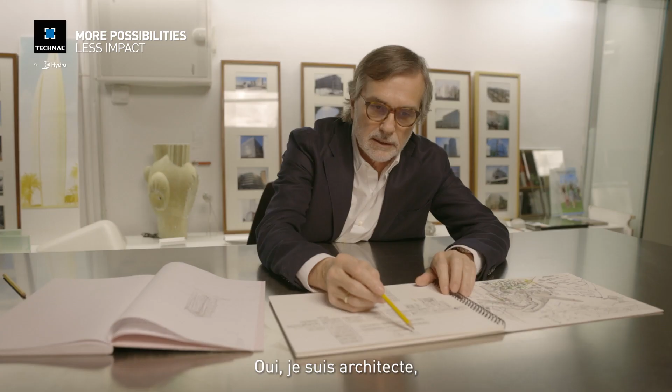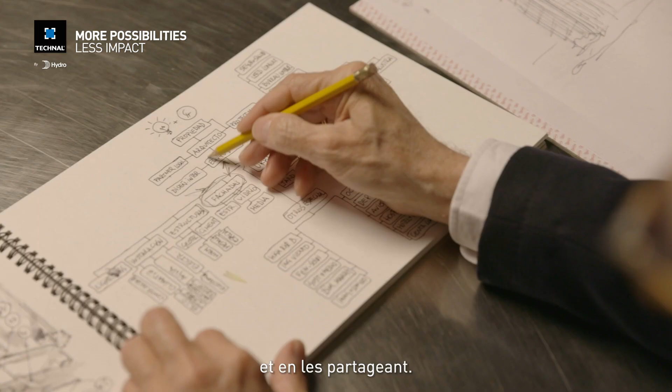First of all, I would like to introduce myself with a simple sentence. Yes, I'm an architect, but an architect with a special profile, because my team and me, we have developed more than 180 buildings over the last 30 years, making credible the ideas of others, sharing them by teaching in different universities, and especially drawing.

We have a small and very dynamic office based in Barcelona, from where we offer facade consultancy for the best architects around the world, including Pritzker Prize winners.

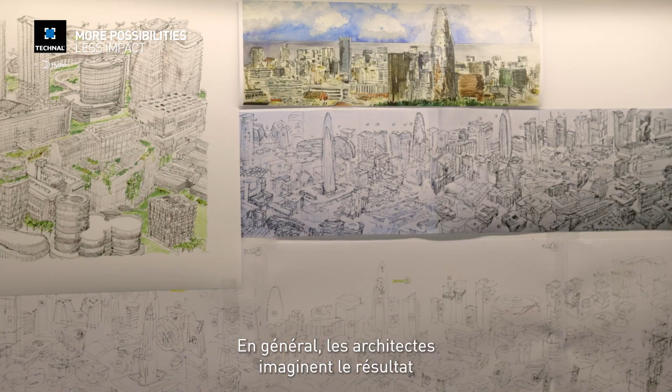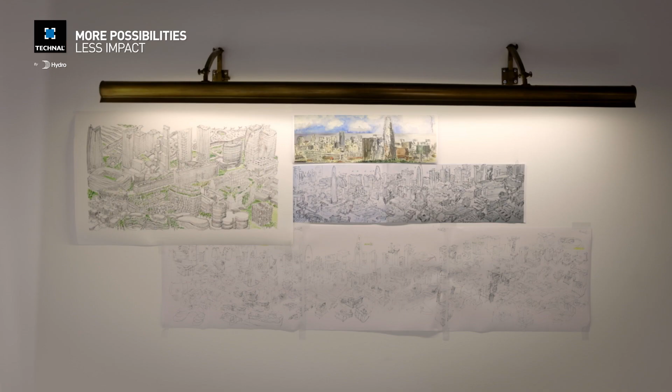Usually, architects imagine the result and the engineers create the process, or explaining it another way, architects think what, and engineers know how. So we, as facade consultants, move in an equidistant position between both, and our projects are developed with a simple philosophy: technique and form are the same.

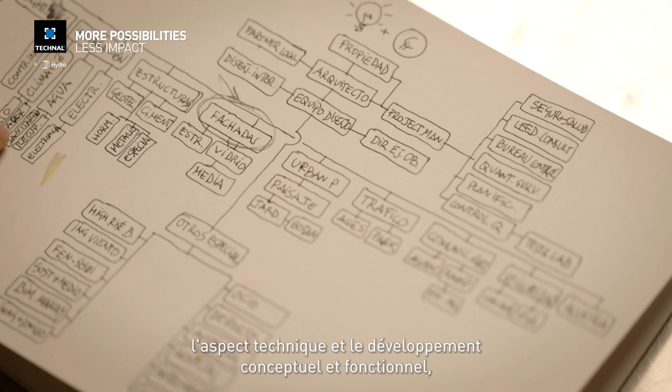Every day, more and more architecture studios focus their work on the level of definition of the facade, the technical aspect, and the conceptual and functional development, leaving the detailing and specific elements of the facade to be delegated to the technical specialists from the industry.

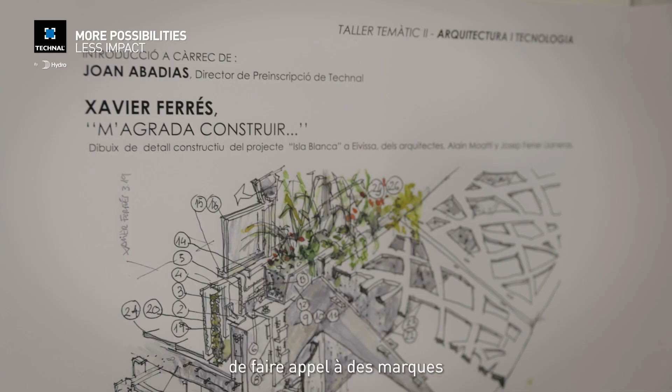So the most common way to face the problem of the technology is to claim the support of brands that help us develop the most ambitious projects. Our role as consultant, in addition to the above, is to think and advise from the strategic development.

The present leads us to consider energy as one of the engines of evolution, and this has been the case for decades. However, this contrasts with the need to work with large formats and glazed surfaces that put the so-called window-wall ratio in contradiction with the energy performance of the facade. On the other hand, this need to increase sizes requires larger panel dimensions, engineered for bigger and heavier glass panels, by means of an innovative connection and reinforced glazing support.

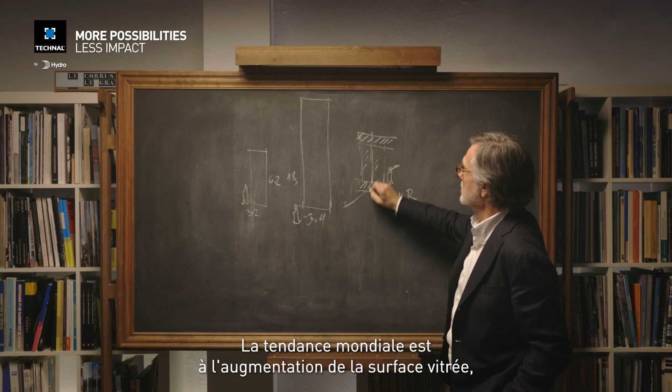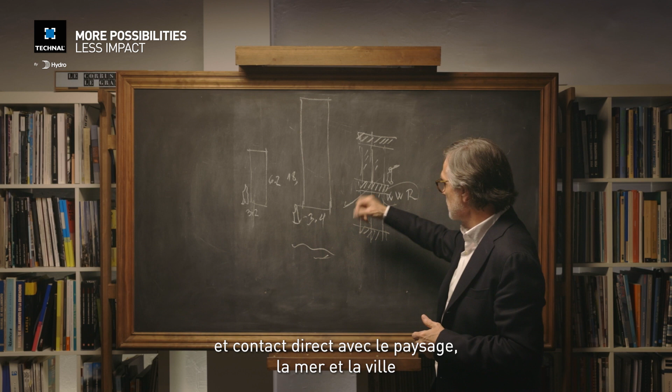Last year, we started with jumbo glass of 3.2 by 6.2 meters. Now, with different suppliers, we have glasses up to 18 meters in height by 3.4 meters wide. So obviously we can use these sizes of glass. The trend of buildings around the world is to increase the glass surface, but balancing with the window-wall ratio, because we need to balance the comfort of users contacting directly, across the glass, with the landscape, the sea, the rest of the city, in order to respect the rules and regulations in terms of energy savings.

The only way that I can explain my experience, my thought, my feeling about the technical decisions, the technical elements, is drawing. My brain is connected with my hand directly.

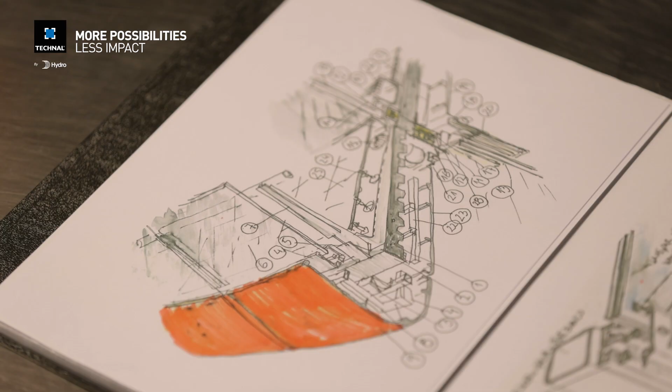When we are creating, we have to pass from the concept and schematic design development to construction documents, trying to be proactive with the architects, normally our clients, in order to achieve the maximal fidelity to the original idea.

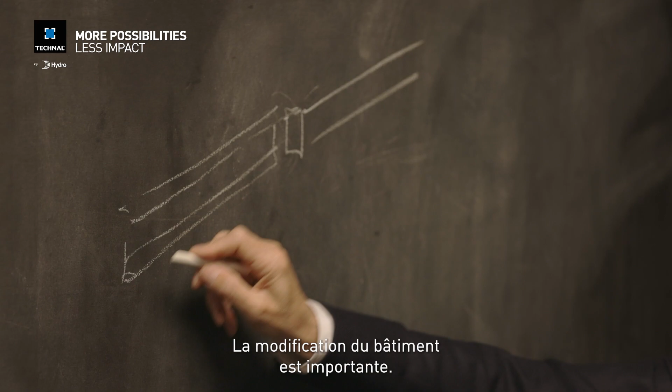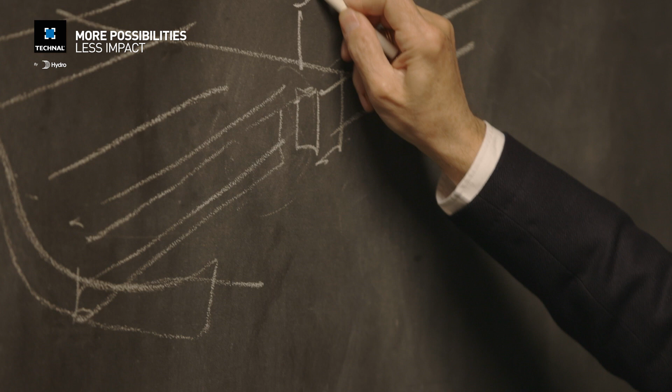For example, a building under construction in Barcelona, named Diagonal Zero Zero, a multi-story building, I think 27 levels, with a special balcony. This is the original slab, because it's a huge modification of the building. This is the slab, this is the beam that we have to support, the level of the interior floor, this is the exterior floor, and we have a shape like this.

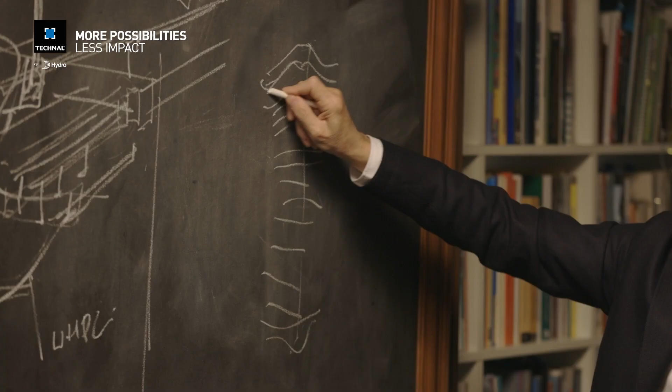This is a balcony, this is a terrace. The building is something like this. It's more or less 110 meters, and all these balconies are here. And here, in the lateral facade, we have a typical curtain wall.

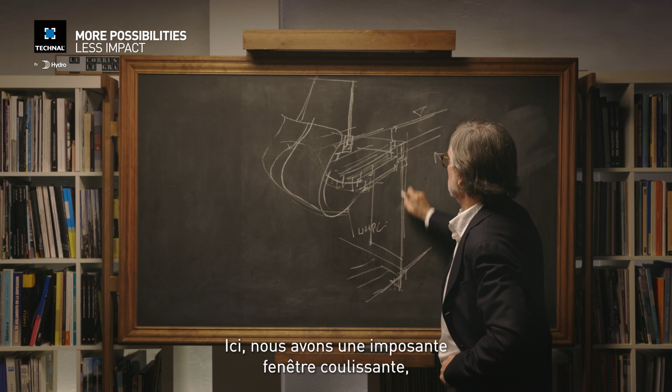It's a profile typical with spandrel and glass and windows, etc. The pass from here to here is very important to understand what happened. What is the slab? What is the structure? What is the weather line? In this case, with a sliding corridor, a sliding window, a huge, maybe 2.50 meter height. We'd like to show this in color, but I think it's clear in order to understand what happened when we have to develop from the concept to the detail.

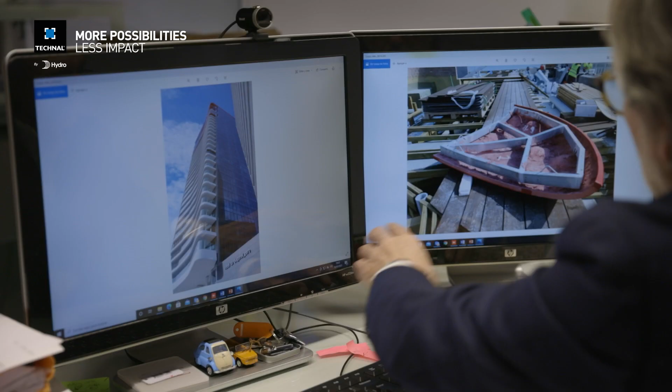The second case we'd like to share with you is a commercial and residential building in Ibiza, named Isla Blanca. The author is l'agence Moatti-Rivière de Paris. The project is led by Moatti, and the local partner is Xavier Ferrés.

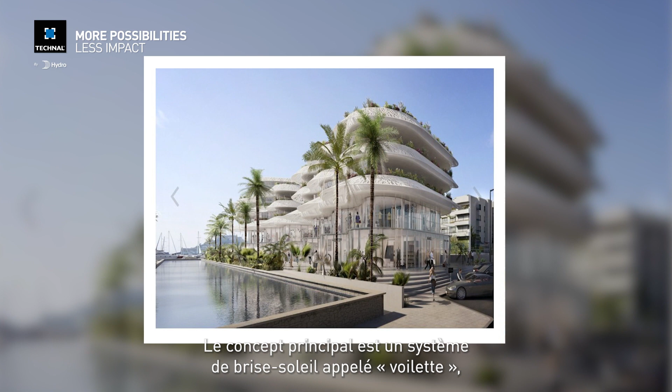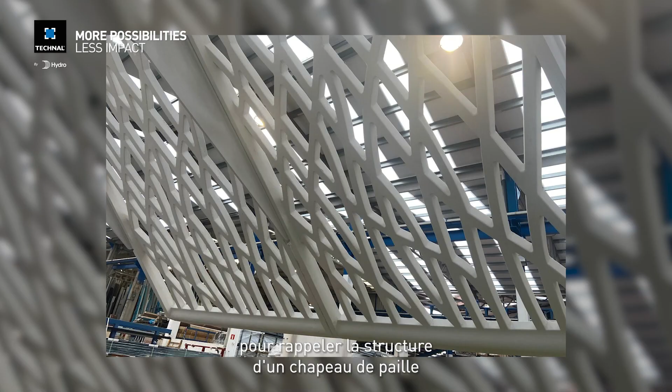The main concept is a shadow device named voilette in français. It's an element qui vole. So the building is double like this, maybe 80 meters of length from here to here, using this kind of material like a hat that produces the shadow under the face of a woman on the beach. And this element is something like this.

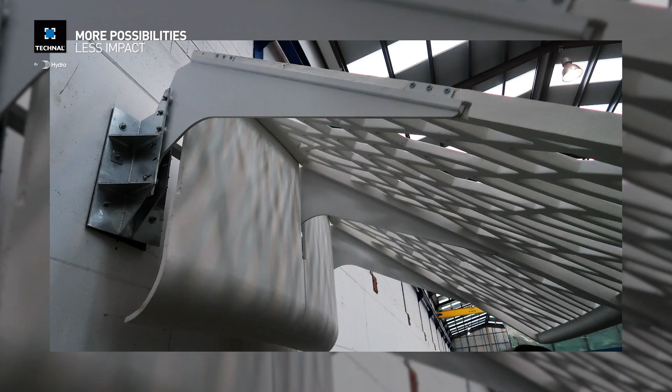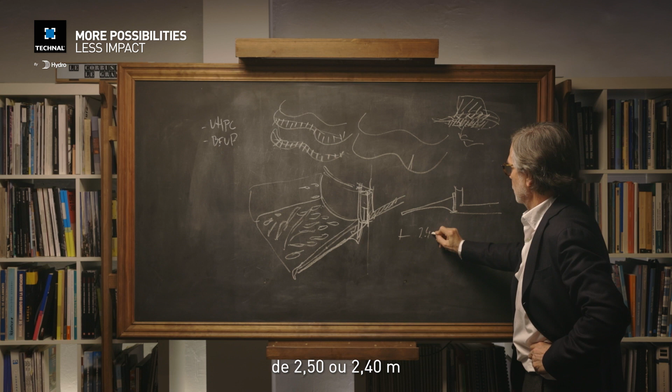There are different molds, because this is the main structure of the building, and here is hanged a huge element like this that supports these curves. So we have the structural element. This is a cantilever, more than 2.4, and this is the voilette in ultra high performance concrete that allows it to work perfectly like a shadow device.

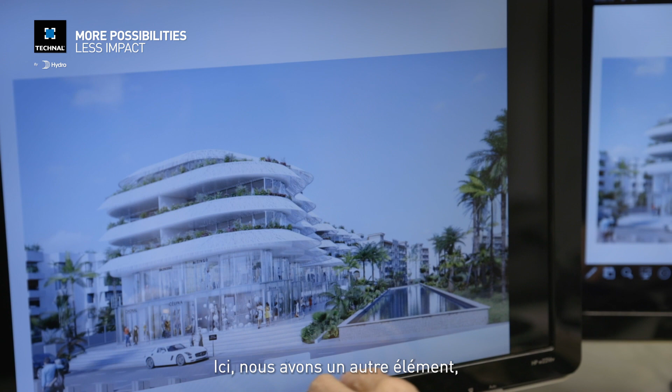So we have the vegetal elements here, and we have the windows, openables, etc. So from here, we have as well another element here that is the characteristic of this building.

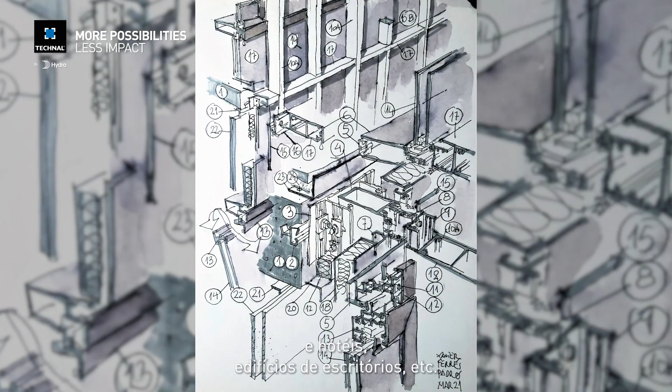The third case study is a multi-story hotel in L'Hospitalet, near Barcelona, in the Plaza Europa zone. It's a huge complex with a lot of buildings, hotels, office buildings, etc. This case is a project of Alonso y Balaguer. It's the most common and typical curtain wall facade. The building is a parallelogram like this, with a typical zone with machines and the HVAC equipment, etc.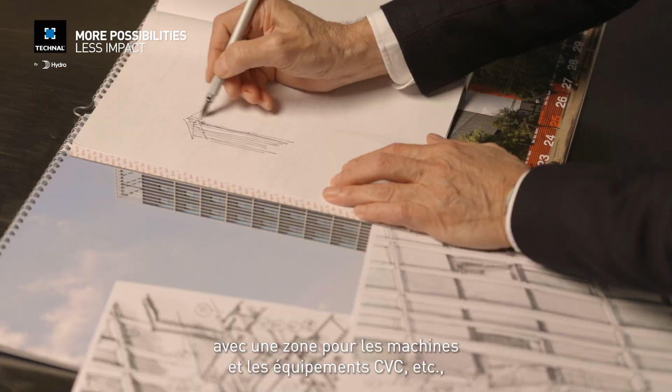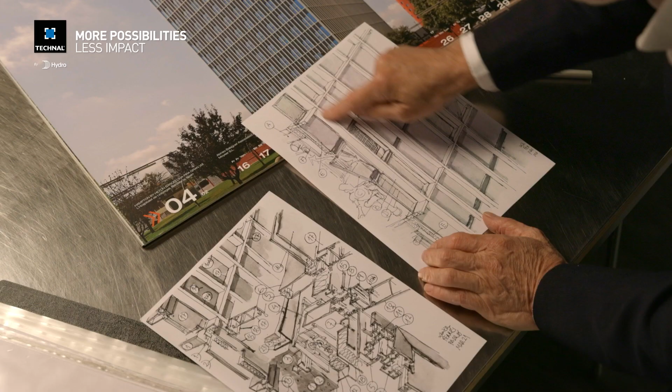The rest of the facade is a grid, absolutely regular, with the profiles that I will explain, because in terms of technology it's very simple, but the effect is really very interesting. So we have these two profiles, clipped, and the main mullion of the facade, and that's it.

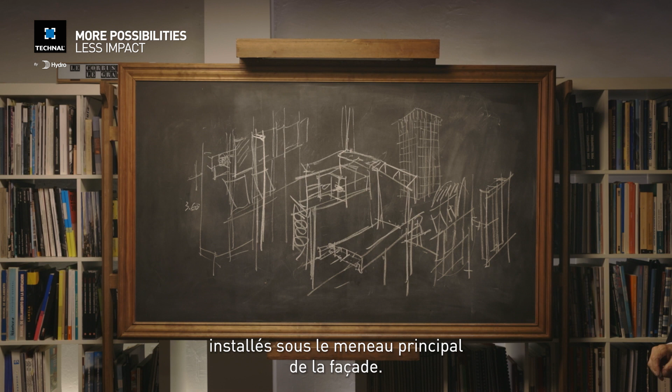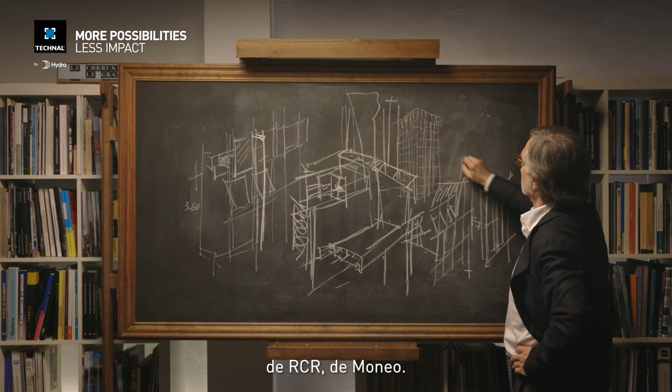So we have here the Toyo Ito building, the Nouvel building, RCR here as well, Moneo. It is a very interesting complex that I invite you to visit, because if you are a passionate architect, I think that could be a good option to spend one day in order to know directly all this kind of different architecture.

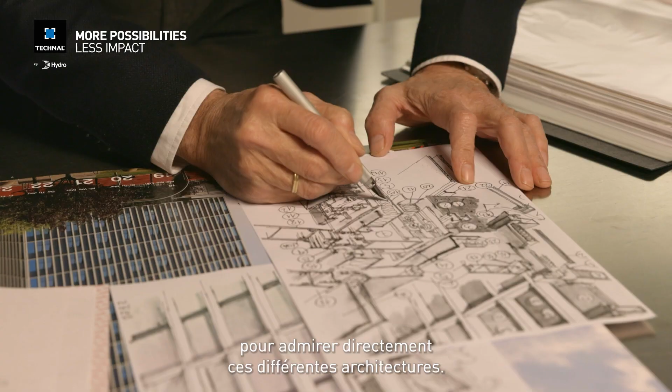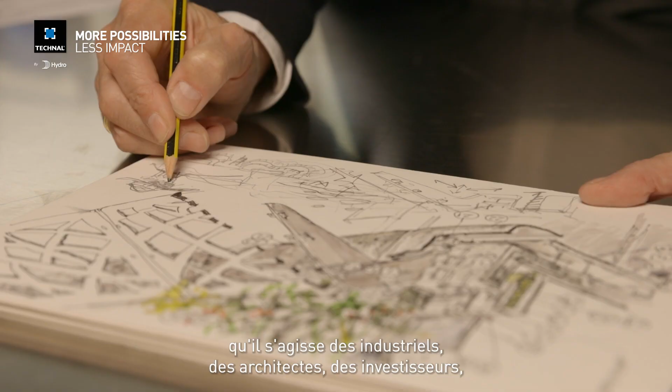As a conclusion, I would like to share with you 5 thoughts as a summary. First of all, evolution that improves considering aspects from different points of view, like industry, architects, investors, owners, and consultants like us.

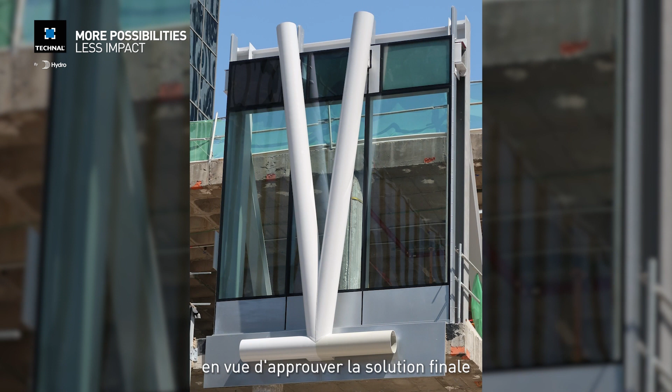Second, the extreme conditions of use are solved by anticipating the problems and building samples and performance and visual mock-ups that are tested by the owners in order to approve the final solution, to check the transparency, the vibration, all the aspects that we have to control by using prototypes and mock-ups in real size.

Third, we have to look for collaboration with international brands that belong to a big and well-known group. This is the best option to guarantee a long experience of success.

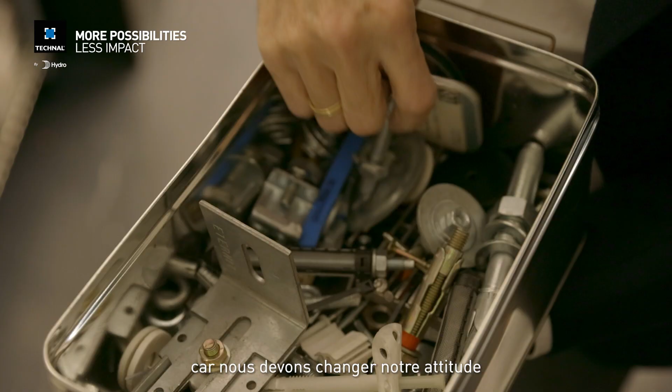The fourth topic, important to sum up this small explanation, is to involve the clients and users in the project: planning, commissioning, exploitation, maintenance, living and recycling the building as a way of working, because we have to change our attitude about the design and use of buildings.

And finally, we have to work from a global perspective, making it essential to combine the most diverse languages, cultures, rules and regulations, economic and social criteria with the most attractive architectural proposals. And for us, it's a privilege to be able to create a space for a better future.

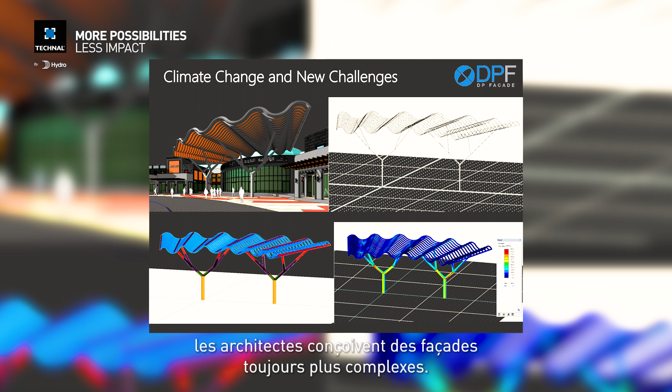On top of that, to make matters more interesting, architects are designing facades that are increasingly complex. It's almost like a competition, who's going to get the ideas that outdo the predecessor, so to speak. And we get complex geometries, various aspects in the design of facades that really challenge us to bring our best when we work on this project.

To do this, we've had to develop or acquire a bunch of new tools that we did not traditionally use. When I started as a young facade engineer, I used to do everything by hand, whether it's the sketches, the calculations, everything was done by hand. Today we are using technologies such as BIM, parametric design, and dedicated engineering software. We make use of 3D rapid prototyping to test ideas, to see, does it even make sense? Is it buildable?

We've even developed tools that are not on the market, something we call IVMU, which is an interactive virtual mock-up, which allows the designers - the engineers, the architects, the owners, the building developers - to use virtual reality goggles to visualize in real time what their buildings and facades are going to look like, and to make changes in real time. This is really a fantastic tool we've developed over the past couple of years, and it really changes our approach to designing facades on these complicated buildings with multiple materials and complex geometries.

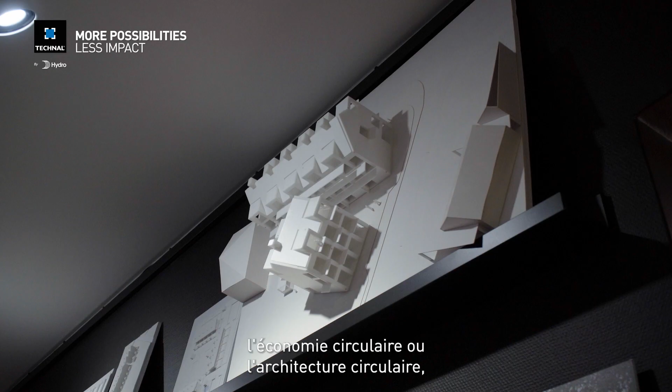The next one is circular economy or circular architecture. And then we work focused with biodiversity. On the social sustainability side, we work with safe environments, health and well-being, and then placemaking.

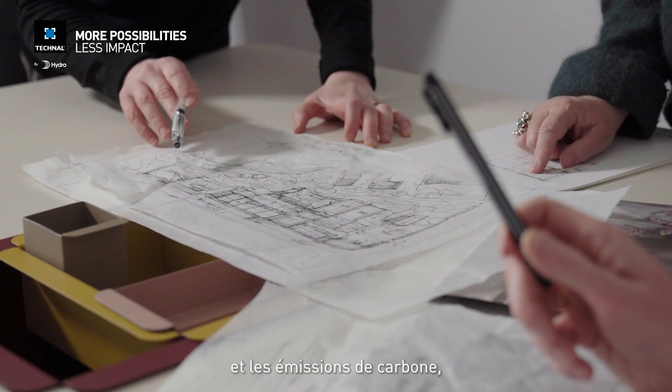So if we start with climate smart architecture or carbon emission as focus, we work very much on designing buildings with a low carbon emission or a carbon footprint. And that is both from operations when it comes to energy efficiency, but also when it comes to embodied carbon, which means the carbon that is emitted when producing the materials that goes into a building.

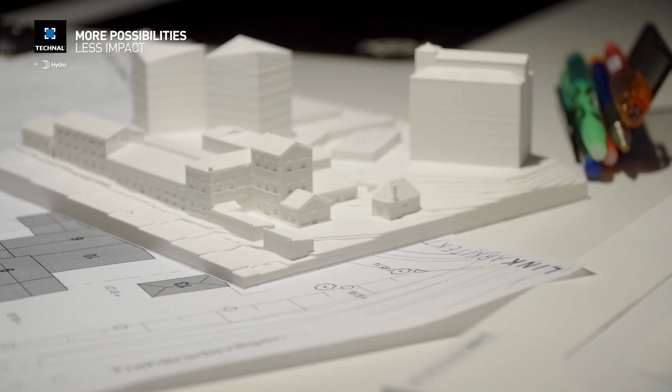If we then talk about circular economy and circular architecture, it's very much about designing resource efficient, securing that we don't use resources unnecessarily, but also about taking care of the buildings that are already built, so transforming or renovating buildings before we start looking for producing new buildings.

It's also about reuse and recycle of materials, and also designing for circularity, preparing our buildings for a future that is more circular than it is today.

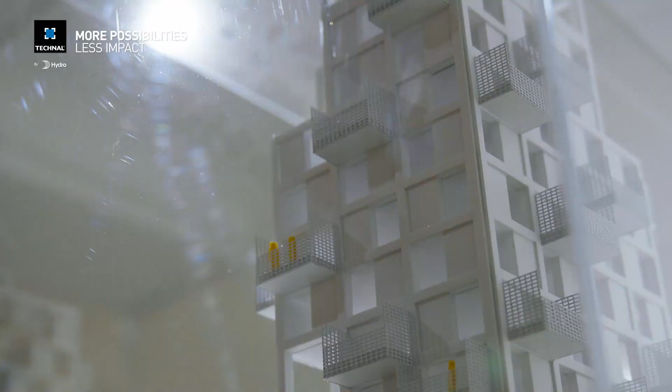And then we can talk a little bit about biodiversity. We know that the built environment and producing materials and constructing the buildings have a great negative impact on biodiversity. So when working with the built environment, it's really important to look at biodiversity and see how we, when we construct our buildings, can choose materials that have a low impact on biodiversity, and also work with biodiversity when we create the environments, the built environments within the cities.

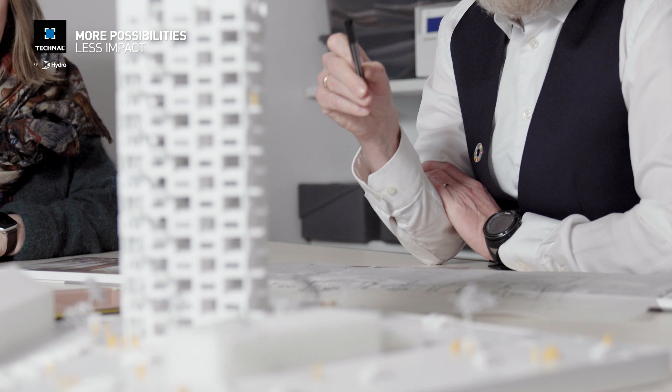If we then talk a little bit about the social sustainability that we work with, one of the areas are safe environments. We know that creating safety within, for example, residential areas, schools, housing, etc., creates people that feel safe and can take in, for example, in schools, can take in their education better. They come to school. Not being safe at school can make students not come to school. So safety is a very important part of our contribution to social sustainability.

And then we can talk a little about the health and well-being. That is an important part if you work with offices, hospitals, schools, also residential areas. If you can support a living that is healthy and supports well-being, then you can solve or contribute positively to some societal challenges. We know stress is an area in at least the Western world that is problematic, and we know about the different heart diseases and so on.

And then the last one is about placemaking, and that is both about safe environment but also about interesting environments, places where you want to stay, places where diverse people can come and meet, and you can feel the inclusiveness because you want to stay there, you want to meet other people.

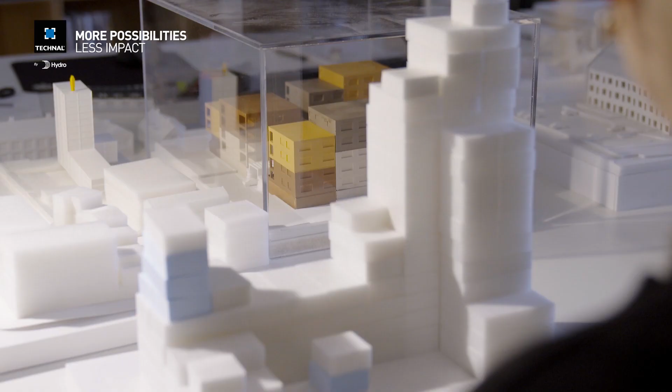And then we also play a very important role when it comes to the actual design. So through the design we can work with, for example, indoor environment when it comes to designing so that daylight comes into the building, that you have a good view of the scenery, and also working with designing so that we minimize the negative impact of the built environment in relation to resource usage or carbon emission and stuff like that.

And then when we come to looking at choices that we make, for example, in relation to materials, we have a great possibility to influence the final positive impact in relation to sustainability by choosing materials that we know can lower, for example, the carbon emission, the carbon footprint of the building, or adding to some qualities in relation to indoor environment.

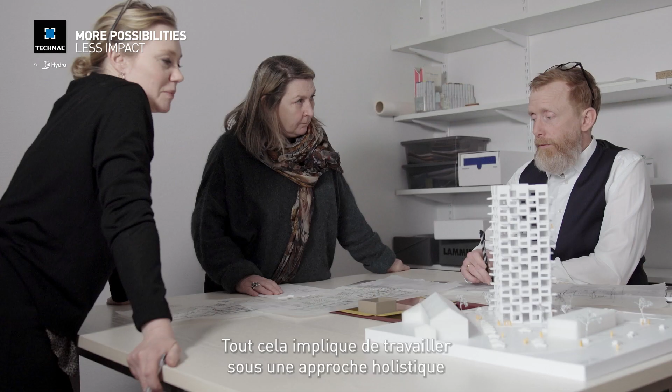We know that the construction industry is emitting some 40% of all carbon emissions, and we also know that the built environment has a big impact on water and biodiversity. All this together makes it really important to work holistically in relation to sustainable development. Talking about carbon emission, it's really important that we not only look at operation, because if we look at carbon emissions, we have 1/3 that comes from embodied carbon and 2/3 that comes from operation. But we also know that carbon emission from embodied carbon is emitted day one, and we're quite in a hurry to turn the trend in relation to carbon emissions.

So we have to have some 40% lower carbon emission in relation to embodied carbon by 2030 to be able to reach the 1.5 degree target defined by the Paris Agreement. So a building that is not addressing embodied carbon, I would say, is not a sustainable building at the moment. Then it comes very natural that the one that has the lowest carbon emission is the best one to choose from a sustainability perspective, so you can compare one with another and go for the one with the lowest carbon footprint.

You should always start with taking care of the negative footprint of your own production, because that one you can be 100% sure makes a difference. When choosing to compensate, you will never know if that forest you have planted as compensation will be there in 20 or 30 or 40 years.

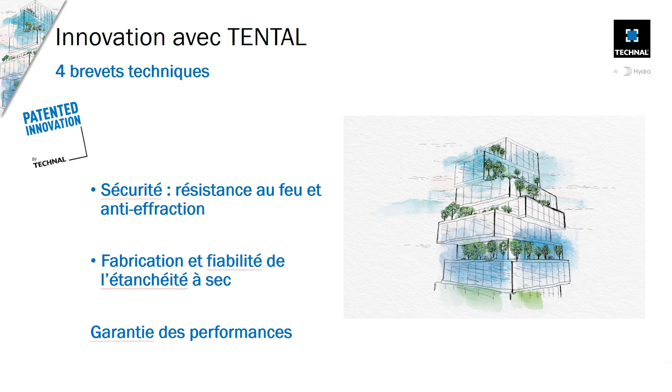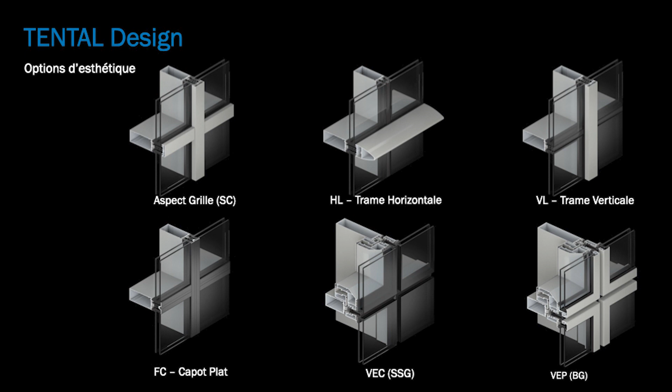Mais une façade, c'est aussi une création, une signature architecturale. Le design était bien sûr au cœur de notre réflexion. Nous vous proposerons des applications variées, allant de l'aspect grille à la façade lisse, en passant par la possibilité de faire des trames horizontales, des trames verticales, du capot plat, ou encore du VEP. Une grande diversité de capots avec des styles et des profondeurs variées qui pourront également être enrichis de créations sur demande. On compte sur vous pour revenir vers nous sur ces sujets.

Jouer avec les formes, que ce soit des vitrages inclinés, des façades à facettes, mais également avec les finitions, tout cela sera également permis. Tental sera disponible dans tous les coloris laqués, anodisés, et vous pourrez profiter des couleurs exclusives Technal pour donner libre cours à votre imagination.

Nos solutions ont pour objectif de satisfaire et d'assurer le confort des utilisateurs finaux. Avec Tental, le confort va passer par la maximisation des surfaces vitrées pour plus de luminosité, avec des surfaces pouvant aller jusqu'à 12 mètres carrés et des reprises de poids jusqu'à 700 kg.

Également la possibilité de gérer les apports solaires, grâce par exemple à l'intégration de systèmes de protection, sans altérer les performances de cette nouvelle façade. Tental présente d'excellentes performances thermiques ainsi que des performances acoustiques pour assurer un confort maximal aux usagers.

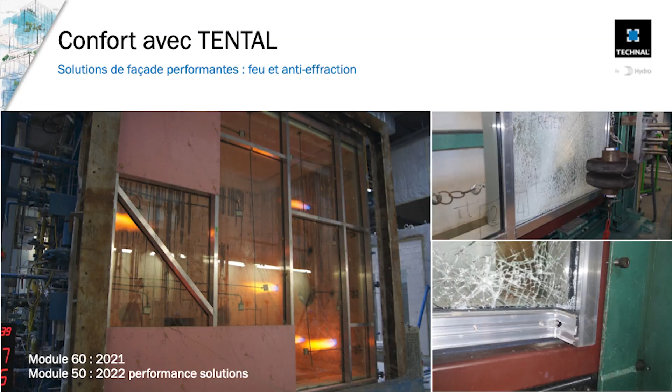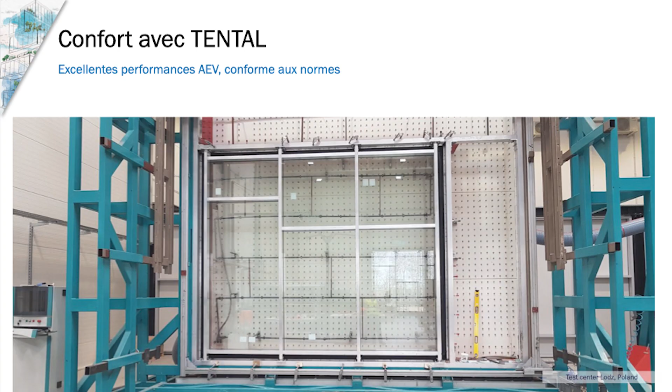Mais le confort, c'est aussi la sécurité. Technal propose des solutions efficaces et éprouvées de résistance au feu, notamment avec des solutions EI60, et de résistance à l'effraction avec des niveaux de CR2 ou CR3 sur certaines applications. Et enfin, le confort pour vous, c'est aussi la sérénité de choisir une façade éprouvée, testée selon les normes européennes et les standards ASTM. Chez Technal, nous proposons des solutions au service de votre créativité.

Participer à la création des villes de demain est notre fierté. Nous sommes engagés dans une démarche éco-responsable depuis plusieurs années et Tental a été conçu dans ce cadre. Tout d'abord, on le sait, l'aluminium est un matériau recyclable à l'infini.

Alors recyclable, certes, mais chez Technal, il est effectivement recyclé. Notre aluminium Hydro CIRCAL 75R est constitué à 75% d'aluminium post-consommation recyclé, ce qui nous permet d'afficher l'empreinte carbone la plus basse du marché, c'est-à-dire environ 2,3 kg de CO2 par kilo d'aluminium.

Et nous allons au-delà, puisqu'au-delà de l'aluminium, nous travaillons également avec des solutions de rupture thermique PET recyclées à partir de bouteilles plastiques. Et grâce aux déclarations environnementales EPD, basées sur les matériaux recyclés, vous aurez la possibilité de chiffrer l'empreinte carbone de votre projet en Tental via notre logiciel de chiffrage.

Toujours dans le cadre de notre engagement éco-responsable, nous travaillons à la certification de nos produits en Cradle to Cradle. Cette certification est reconnue dans différents pays et par de nombreux labels, pour n'en citer que quelques-uns, le LEED ou encore le BREEAM. L'objectif est de pousser l'amélioration continue dans le cadre d'une économie plus circulaire. C'est une démarche volontaire qui évalue nos solutions dans leur ensemble autour de 5 critères environnementaux et sociétaux. Tental est en cours d'évaluation pour obtenir le niveau argent.